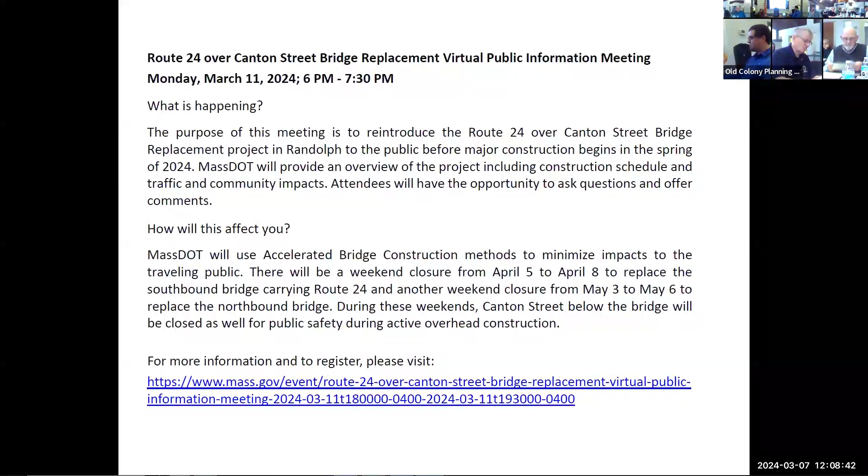Next item is the Massachusetts Project's Intake Tool, MaPIT 5.0 Virtual Classroom. There will be 3 sessions available from the UMass Transportation Center, March 21st, 27th, and 28th, all at 10 a.m. For more information on these meetings, please visit the hyperlink in the staff report.

The next item is the Federal Funds and Infrastructure Office, which is the lead agency with the Healey-Driscoll administration, tasked with implementing a whole of government approach to ensuring the Commonwealth of Massachusetts can leverage historic opportunities available for federal funding. For more information, please visit the hyperlinks in the staff report.

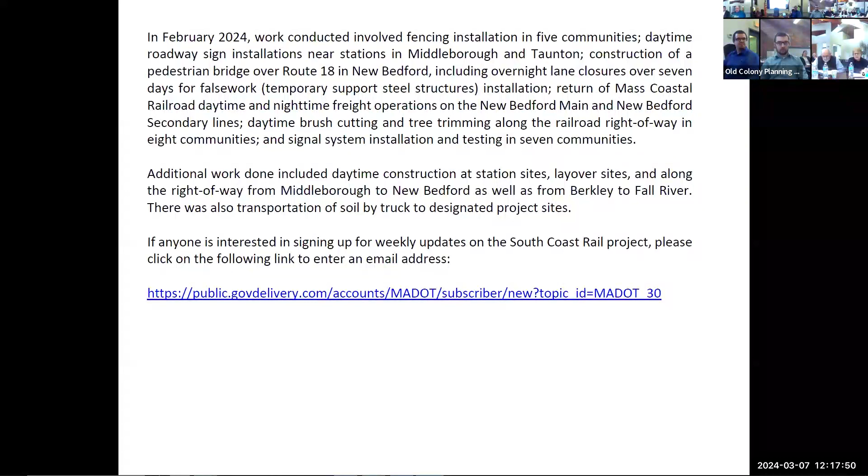Yep, thank you Madam Chair. So I'm just gonna talk about a couple of project updates here, mainly affecting this current fiscal year. You can see on this page, if you've been coming to these meetings long enough, you know that anytime I use the color red, that's a scary color. And you can see there we have a project in Brockton that had been programmed for this year.

Reconstruction and intersection improvements at Center Street at Plymouth Street, right over here just on the other side of the viaduct by the BAT Center. That is not expected to advertise this year. I'll talk a little bit more about that in the next agenda item when I discuss tip readiness days, where we talked about this extensively, but at this point we don't see a path to that advertising this year. Unfortunately, that does leave us with a pretty large surplus of unprogrammed funds at this point in this current fiscal year. We're working with MassDOT and Brockton Area Transit to see how we can use those funds. So that will bump that project to 2025 at least, and I'll talk about that a little bit more on the next agenda item.

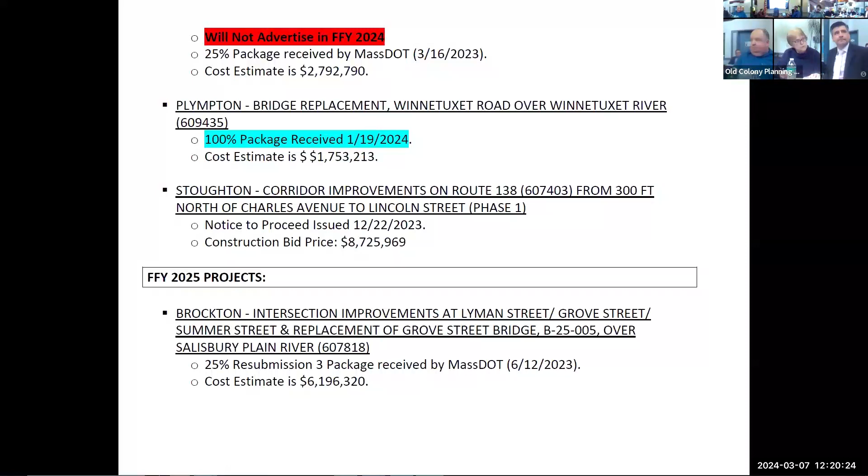Yep, yes ma'am. So the last agenda item was talking about the current tip, and this is the new one that we're developing, the 2025 to 2029. A big part of the development of this is tip readiness days, a day in February where the MPOs and different groups at MassDOT get together and talk about project readiness. We look at the current federal fiscal year, the 2024 projects, then we look at those years in the current tip, and then we look at potential new projects that could be brought into the new tip. So this is a major development milestone in the tip. I'll just talk about the results of tip readiness days on the next page.

Okay, so this one's looking at this current federal fiscal year, 2024. You can see shaded in pink there, the intersection I just spoke of in the last agenda item, Center Street at Plymouth Street. Due to right-of-way issues as well as environmental issues, that does not appear to be able to advertise this year, so that will have to be moved to 2025.

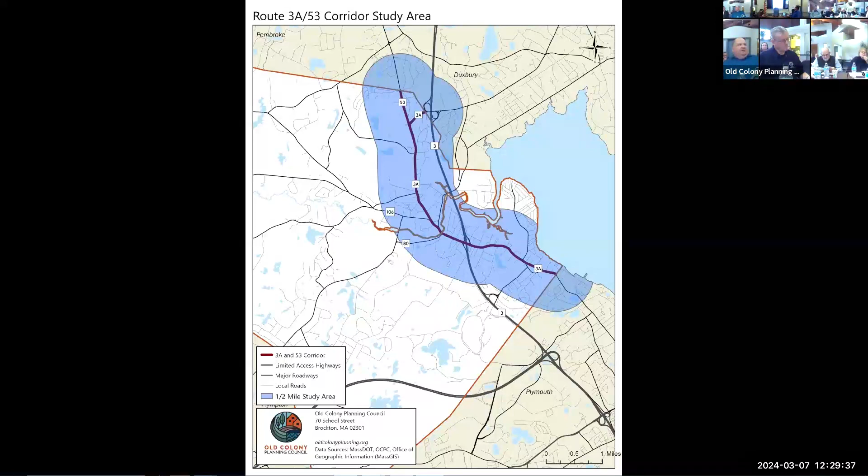You can see here locations that had a higher than average crash rate: Route 3A at Route 53, Route 3A at 106, and Route 3A at Howland's Lane. So these are the biggest safety areas that have popped up so far. None of them are glaring, none of these are what we consider crash clusters, but they are above the regional average for intersections, so that's something being flagged.

Similarly, we've also done a risk analysis, screening for the corridor and areas with elevated risk in those emphasis areas that are in the highway safety improvement program. For lane departure, we have a section of roadway considered at risk. For older drivers, we have a section of roadway that's at risk, and similarly for younger drivers, a section of roadway that's at risk. So those are being identified in this plan as well.

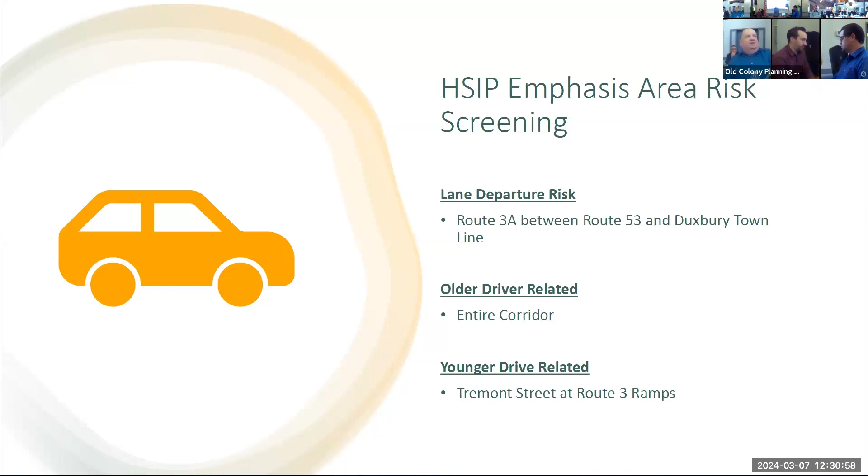This gives you an idea of what we've done for the data collection. This shows data that's been collected along the corridor. These are traffic counts, actually turning movement counts, broken into AM peak hour and PM peak hour. With that, we've been able to do a level of service analysis.

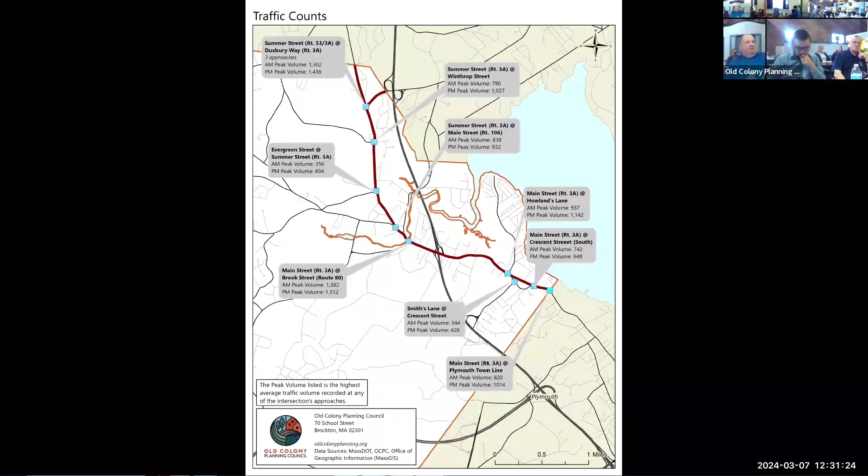And these are areas that have been identified as congested along this corridor: Route 3A at Route 53, Route 3A at Route 106, and Route 3A at Landing Road. When I say congested, I mean these are locations where the level of service grade is F. If we include intersections with a level of service of E, there are a few more, but these are just those with an F.

So that's an overview of what we've done so far -- a lot of data collection and analysis. We've met with the town, talked about land use surveys, and brought in our comprehensive planning team. So we're looking at comprehensive planning along this corridor as well, how that area can grow and develop in the future. That's a factor in this study.

Right now, the biggest things done so far are the traffic analysis, and now we're looking at potential improvements, and working with the town on priority areas where they want to guide how the corridor develops, and potential growth areas. So that's what we're doing, and it's on track for completion this year. Later this summer, we would have a completed report for this.

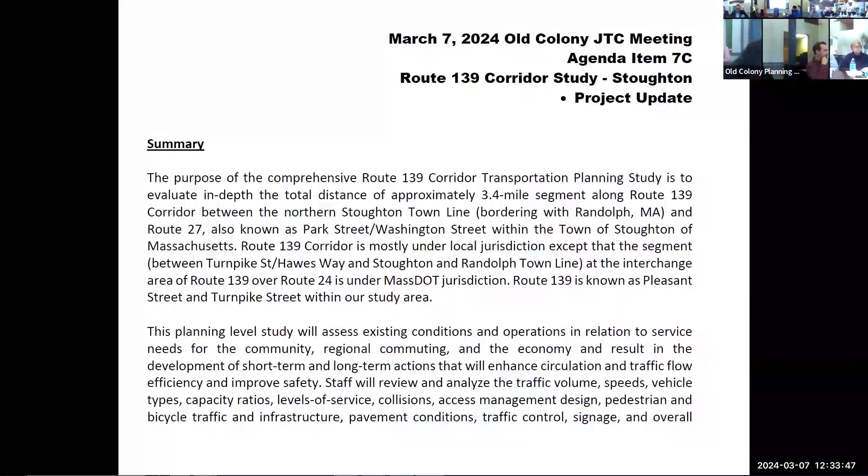I'm here to give a very quick update on the Route 139 corridor study, and for the presentation, please. So our team of transportation at OCPC is working on the Route 139 corridor study with the town. I'm just going to give a very quick overview of what we are looking to do and what's our next step. This is a very long list of the things that we do, including public outreach and community outreach.

The core part of the study is the analysis, including the existing condition analysis and future analysis. So we are working with the community to gather additional data for future developments. All the data collected will be processed in computer programs such as TransCAD, Synchro, and simulation. So the core value for the study is to leverage information, assistance, and resources for the town to move forward with the project. The town has been working really hard with a couple locations that I'm going to outline in the next couple slides.

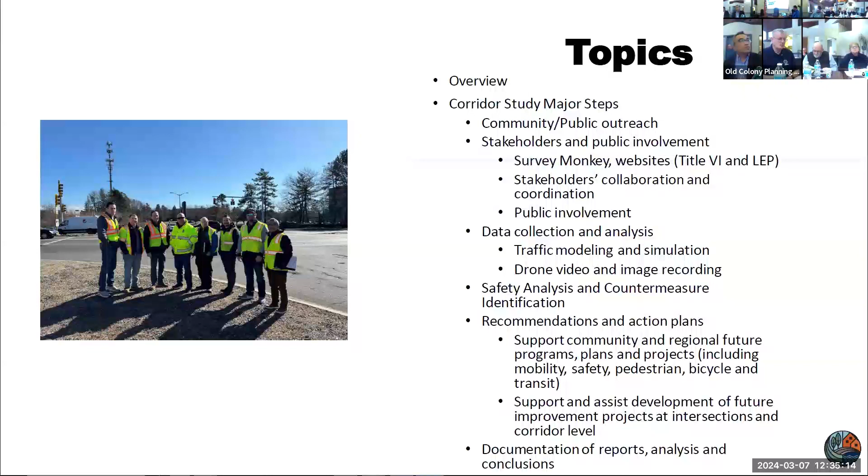We also have identified the preliminary issues along the corridor in terms of congestion and safety. So the project will be completed by the end of September this year. We are reaching the midterm at this point.

So the overview for the corridor: essentially it's about over 3 miles, center line miles, for the complete corridor north of Route 27 in Stoughton. Most of the corridor is under Stoughton's local jurisdiction, except the area -- I believe it's north of Hawes Way to the town border with Randolph -- which is owned by Massachusetts.

The road classification is principal arterial road, both under federal classification and state classification. The study was funded and enabled by UPWP number 3400.

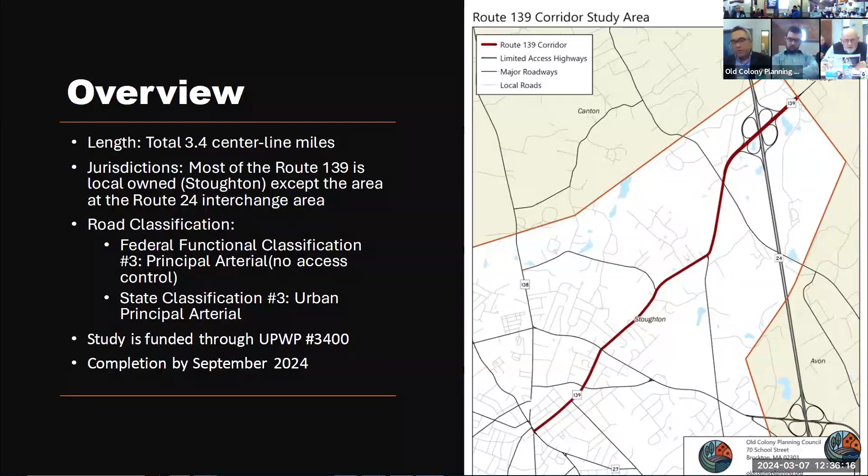This study has been built upon previous efforts, including the early years of 2010, the Route 139 corridor study, including 3 towns. OCPC also conducted road safety audits, including the Central Street Corridor audit in 2018. For this project, a corridor study was assessed in 2022 as part of a regional high priority corridor screening, where we ranked all major corridors in the OCPC region and found this one of the highest priority corridors, which is why we have this study here.

We also had a 2022 pedestrian safety and mobility audit at Lindelof Avenue with the town. So this is where we are. We launched the study in October of last year.

There's a mixed land use along Route 139, majorly residential, commercial, and industrial. There are some sensitive areas, for example forest, wetland, and agriculture. This is not our main focus, but we will include it in the corridor study. Until any transportation improvement, we will be mindful of the environmental sensitivity issues.

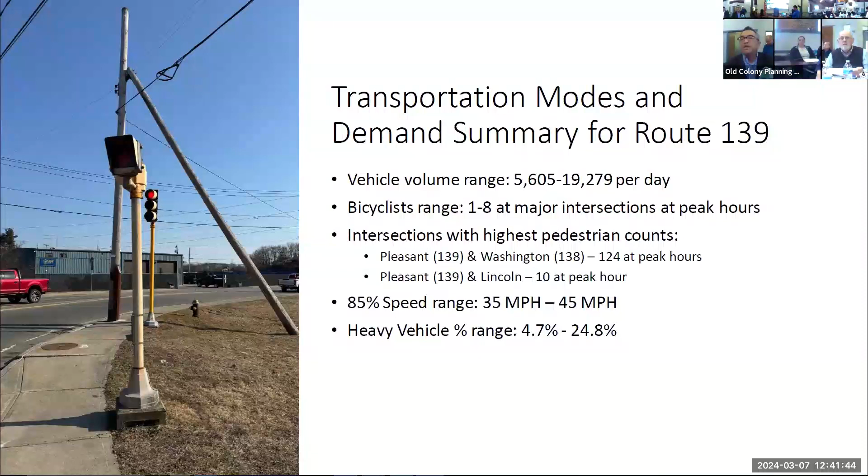We are not surprised to see heavy vehicles ranging from almost 5% to 25%, since there's industrial land use there, including some industrial warehouses.

We also used the Synchro software to conduct a level of service analysis. As Bill mentioned, a level of service E or F means the intersection is operating over capacity, so the average traveler may experience more than a minute of delay. That's significant, but in some urban areas, a 1 minute delay seems acceptable.

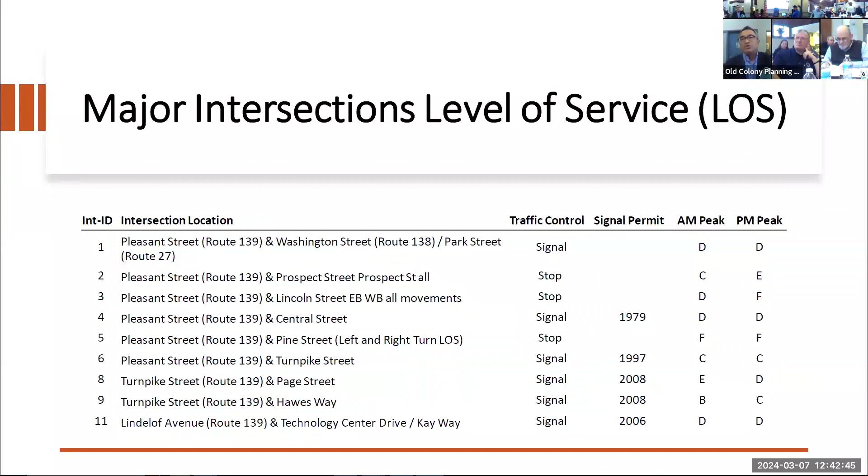We were also looking into detailed turning movements, since turning movements are harder and can cause delay, so we will work on recommendations based on the analysis. Some stop-controlled intersections might look bad in terms of level of service E and F, but it's acceptable because it's a side street experiencing more delays.

As I pointed out, one of the reasons this project was selected is because of its high crash locations. In fact, Lincoln Street is among the state's top 200 list and in the 5% intersection crash clusters.

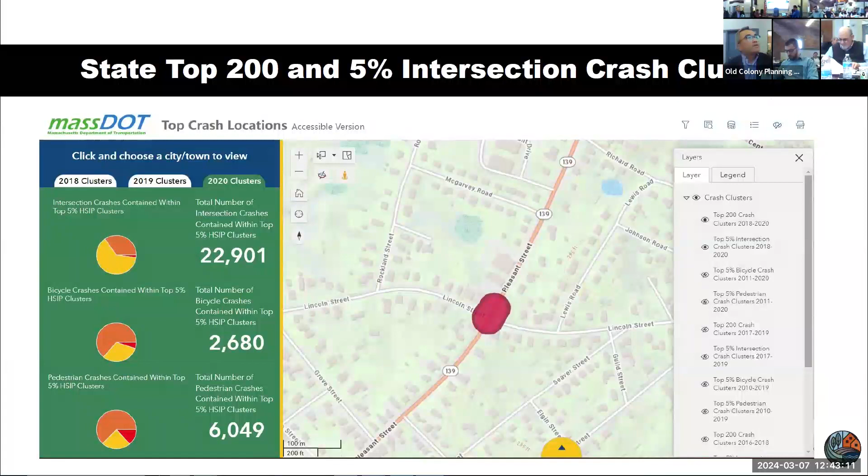We have preliminary crash analysis done at this point. As you can see, the Lincoln Street intersection has high crash occurrence.

Next. So we had a meeting with the town, and we all went out to do a safety audit. For the next couple of slides are the preliminary findings that we have.

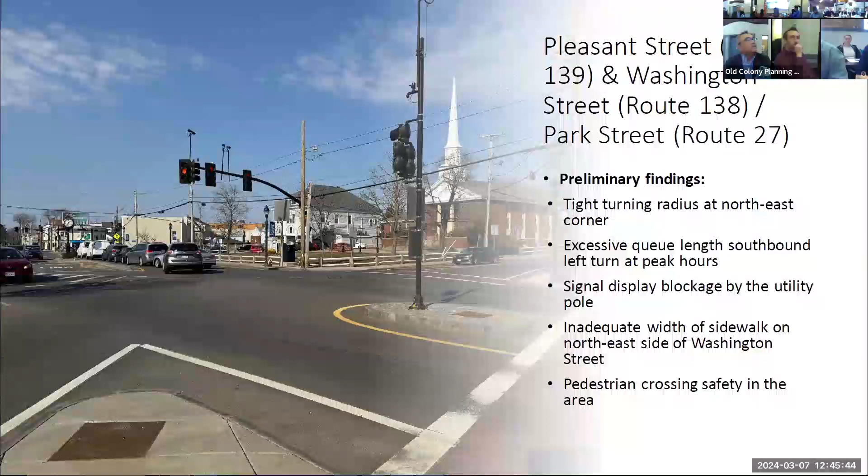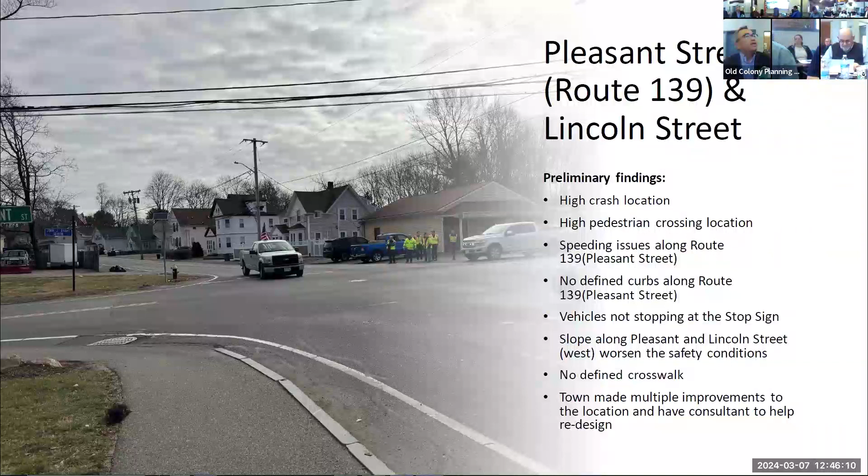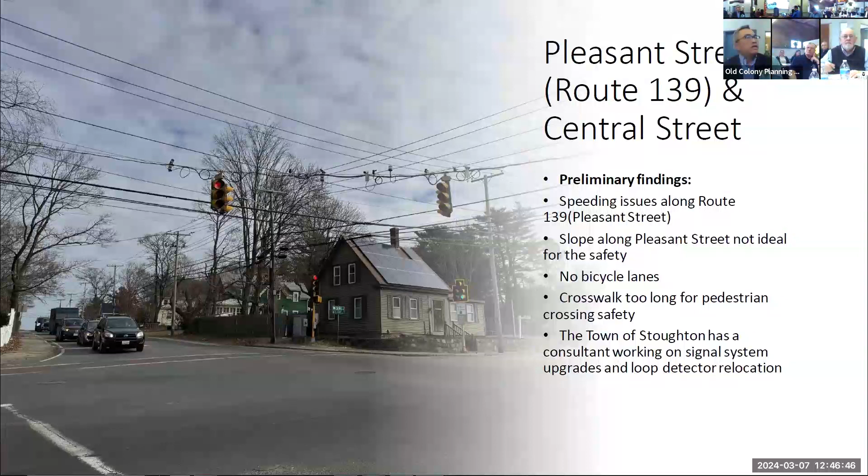Next. So this is at Central Street. The speeding — I should have also mentioned all the locations have somewhat speeding issues along Route 139. There's a slope issue there, no bike lane. The crosswalk, as you can see on the screen, is way too long for pedestrians to cross safely. Very similar to Lincoln Street, the town is working on it and has a consultant to redesign, to upgrade the signal system and relocate the loop detector.

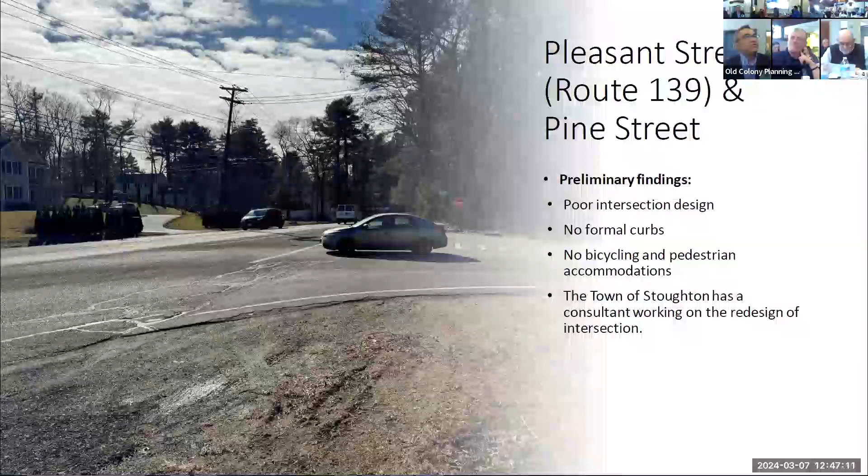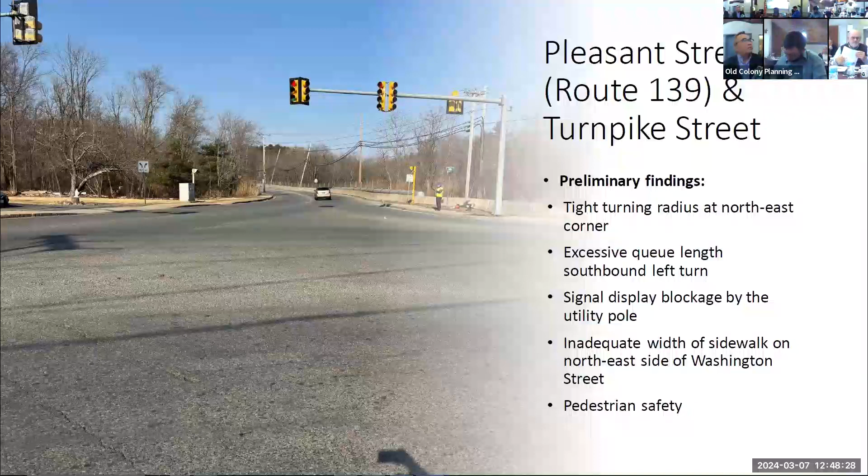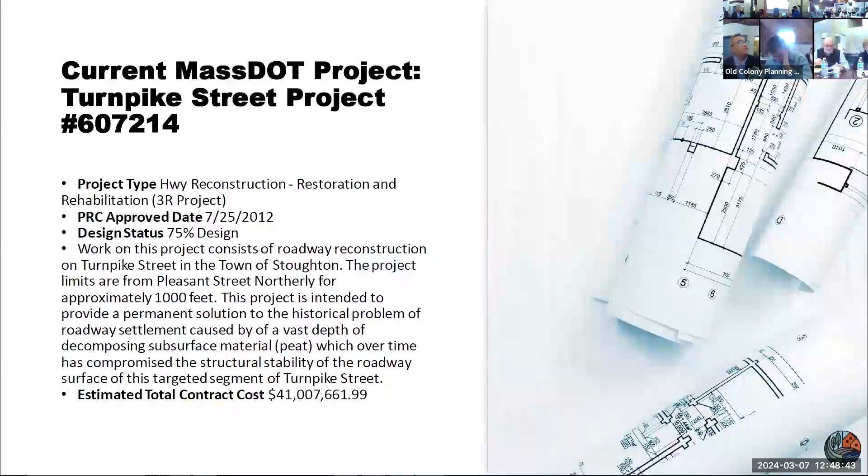Next please. Okay, so this is just a little bit more detail on the state project, number 607214. Some of the description here will be included in the package for the meeting.

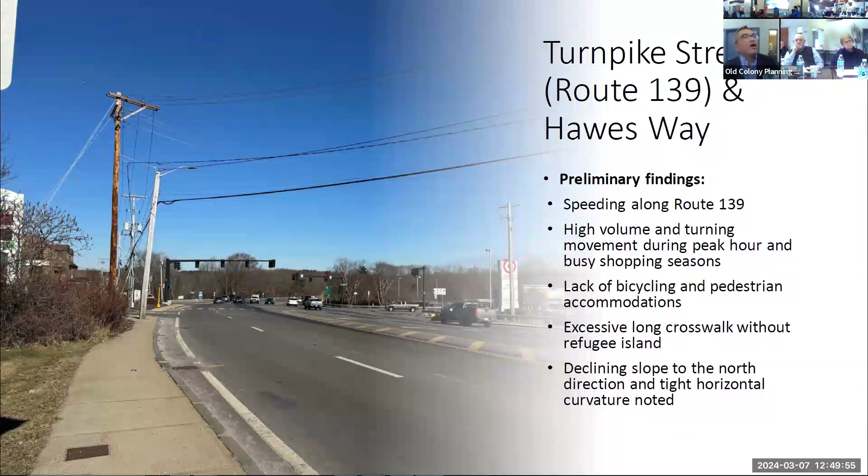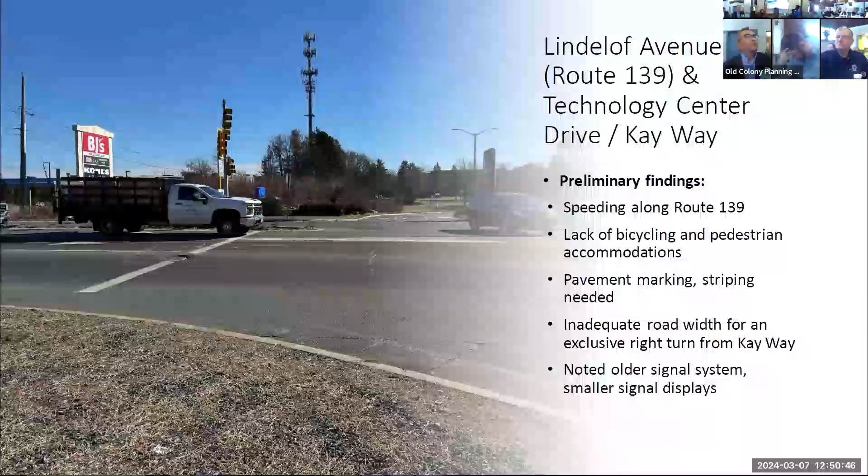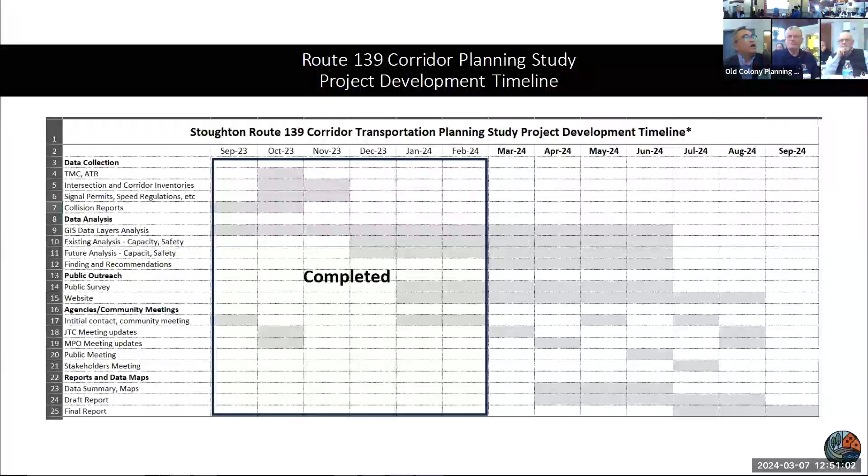So this is just a timeline of where we are right now. We're happy with the progress. Heading to March, we're going to have a public survey.

Our staff created a Survey Monkey that takes in the public opinion of people who drive in the area and use the corridor. There's a total of 13 general questions and some sub-questions. It's going to take 5 to 10 minutes to complete, but it's going to be very helpful. Our questions are not only general, like their vision for the future of Route 139, but also particular questions like the transportation mode - would they be happy to ride a bike or walk along the corridor? I think that would be really helpful to guide our study.

This survey is also translated into 4 other languages, including Spanish, Portuguese, Haitian Creole, and Chinese. Ray spent a lot of time helping with the survey as well. The survey will be posted very shortly after the meeting on the website, so feel free to go on and help us fill out the survey. Hope you find it helpful.

I hope I don't miss anything important, but this concludes my presentation of the project update. This is all my information, feel free to reach out to me if you have any further questions.